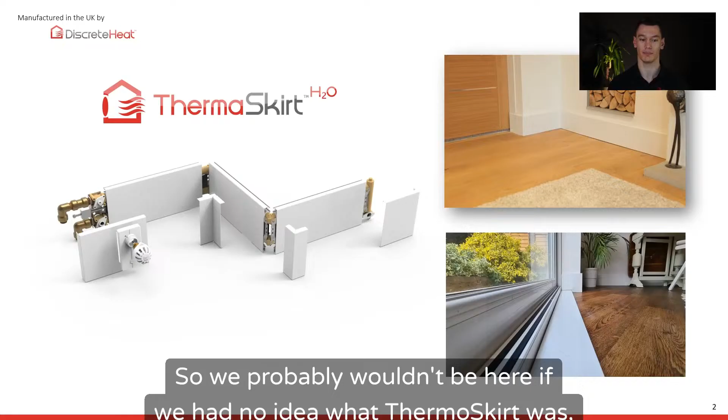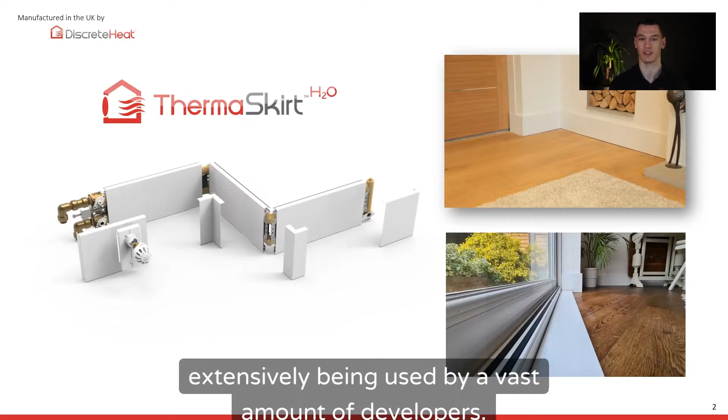So we probably wouldn't be here if we had no idea what ThermaSkirt was, but essentially it's just another heating alternative to underfloor heating and radiators. But it's disguised as a skirting board in an aluminium panel, as you can see from the pictures. It's used in both retrofit and new build programs and is now extensively being used by a vast amount of developers. One of which to name is actually Barratt's, one of the largest UK house builders.

So I'm going to leave you with the technical director of Barratt's and Channel 4's George Clarke with their thoughts on ThermaSkirt before we get into the nitty gritty.

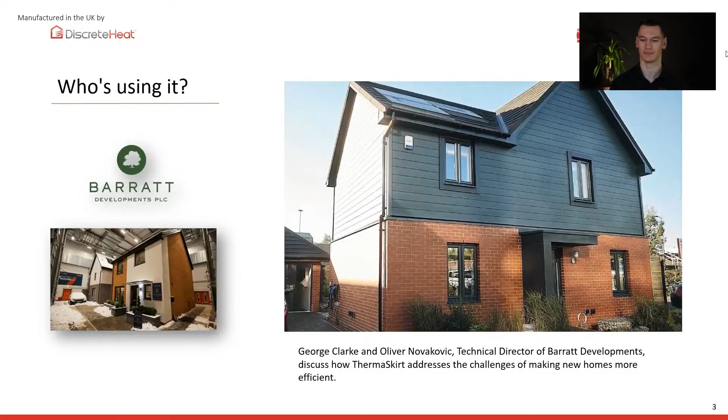There's some great stories around the Zed House. And I mean, obviously we can't physically see it. I wish we were there having a look around it now, but just paint a picture of what it's like in terms of design and innovation. Yeah. I think the most important thing for me was that the Zed House looked normal. So the Zed House is actually called an Alderney. It's one of the houses we build many thousands of. We have 400 sites, so we're selling a lot of these, so we know customers like the house.

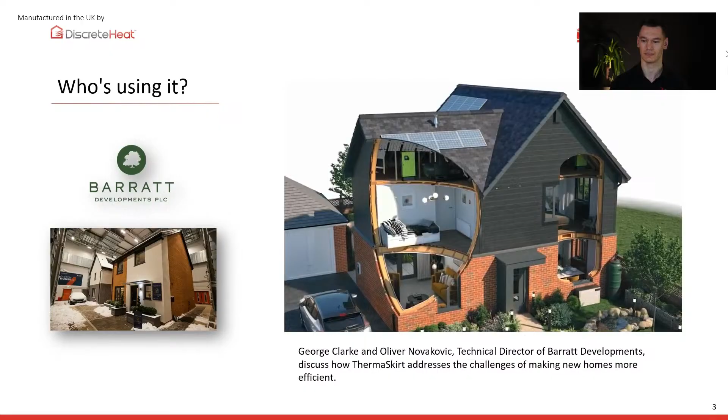The second most important thing was that you could be green in this house without having to try, without a change to your lifestyle. So if you were to walk up to the Zed House, you wouldn't know that it was a zero carbon home. And if you walked around it, except for an air source heat pump on the outside, which wouldn't be normal in today's house, and some of the innovative heating systems like infrared and skirting boards that deliver heating, you wouldn't know. You'd just live a normal life, but actually you'd be saving 70% of the energy that you'd usually use. That's quite a lot, isn't it? So skirting boards deliver heat energy?

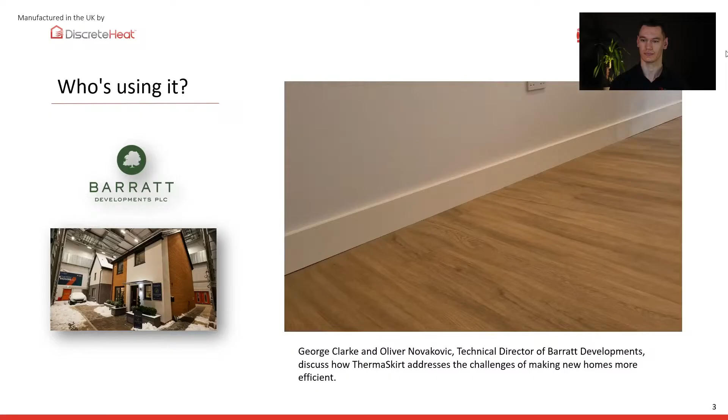Yeah. So you'll know with the air source heat pumps, the temperature of the water reduces down to 40, 45 degrees, so you need a lot more surface area. The problem in the houses is surface area delivered by radiators means they could be quite big, and radiators get in the way of furniture and other things. So Salford University actually introduced us to this innovation where the hot water goes into the skirting board. So all of your skirting boards are the radiator. So you've got no other radiators in the house? So in the Zed House I have, because I'm testing. But actually in some of the other houses we're now trialling, we won't have radiators. We'll either have skirting board heating or underfloor heating.

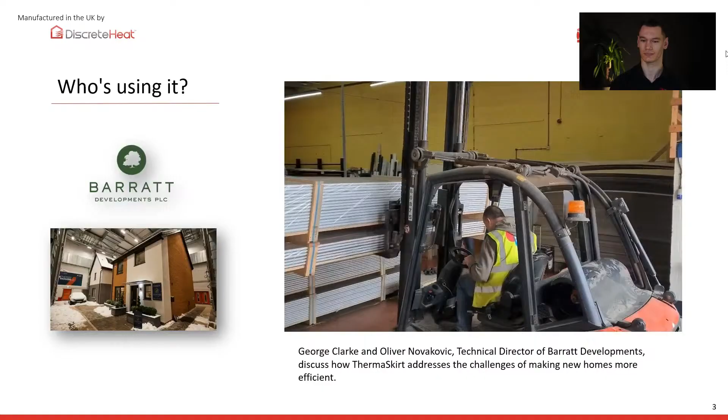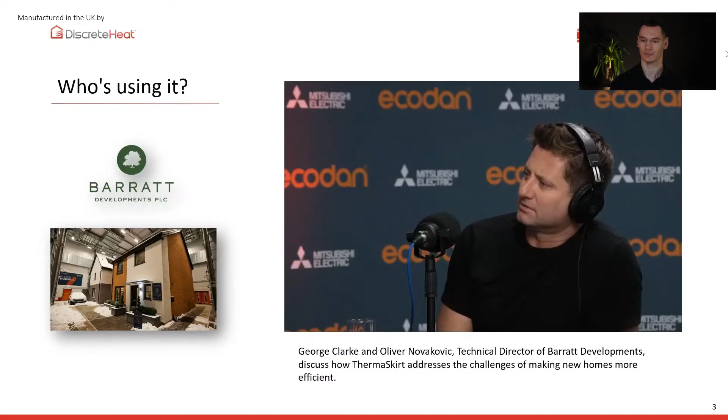So multifunctional skirting board? Yeah. Love that. And what's great about it is that you can also put electric down it. So as you know, as we move further along the zero carbon agenda, we're going to really concentrate on fabric. So the skirting board's a bit like ductwork for running services? Yeah. So as you know, in offices, we've regularly ran electrics, haven't we, down the service. Here, we're running hot water in the skirting board. There's some great...

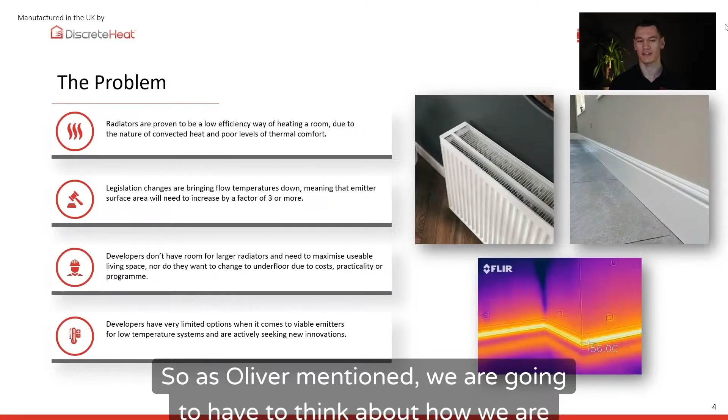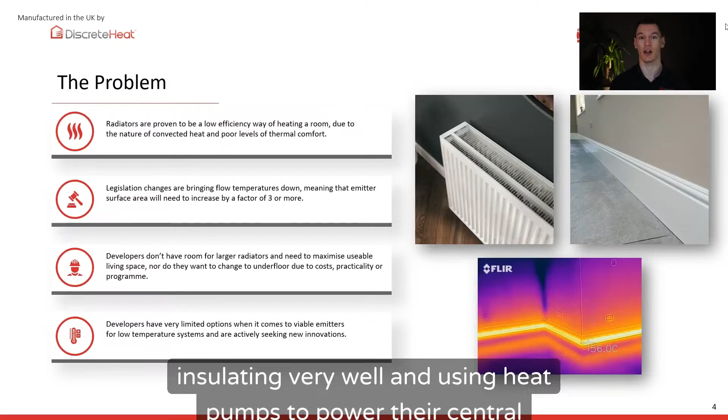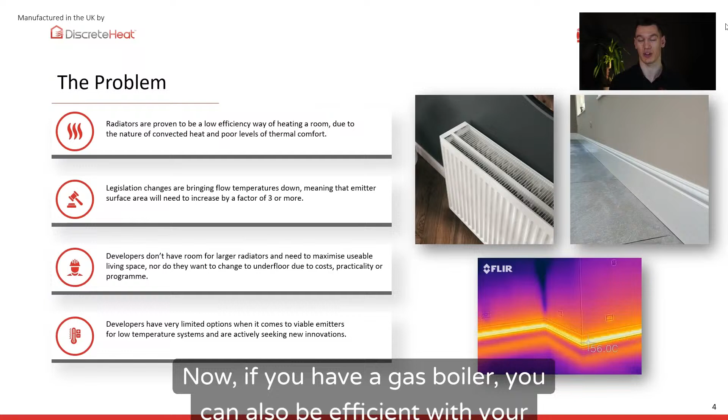So as Oliver mentioned, we are going to have to think about how we are going to be more efficient with our heating systems. And how Barratt's will do this with their new build houses is by insulating very well and using heat pumps to power their central heating, running at really low flow temperatures. Now if you have a gas boiler, you can also be efficient with your heating system too, by reducing the flow temperature to around 55-60 degrees. Obviously you'll increase the efficiency of your boiler.

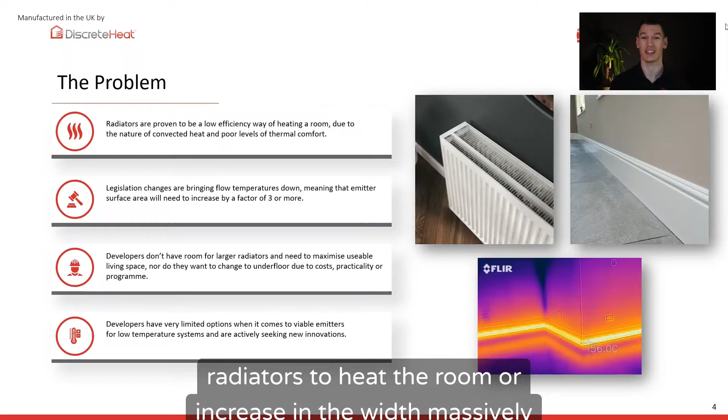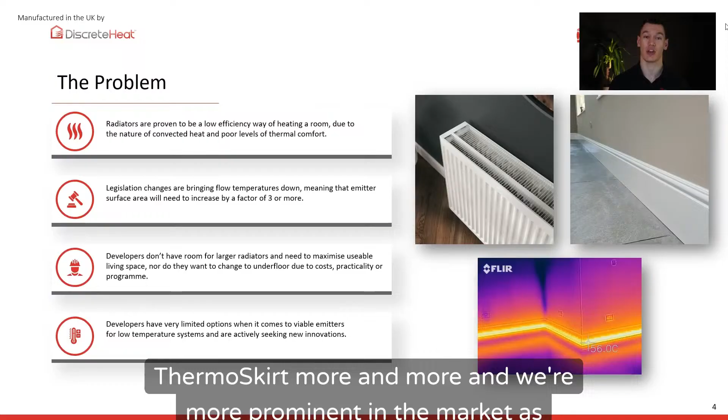However, as developers are experiencing, if you do reduce your flow temperatures, you are going to have to increase the size of your emitters. So with radiators, you'll be looking at either double or triple panel radiators to heat the room, or increasing the width massively along a wall. This isn't particularly aesthetically pleasing for developers or one of our 80,000 customers that we have to date, which is why they're looking to use ThermaSkirt more and more, and we're more prominent in the market, as we fit a nice aesthetic heating solution that's efficient and works really well.

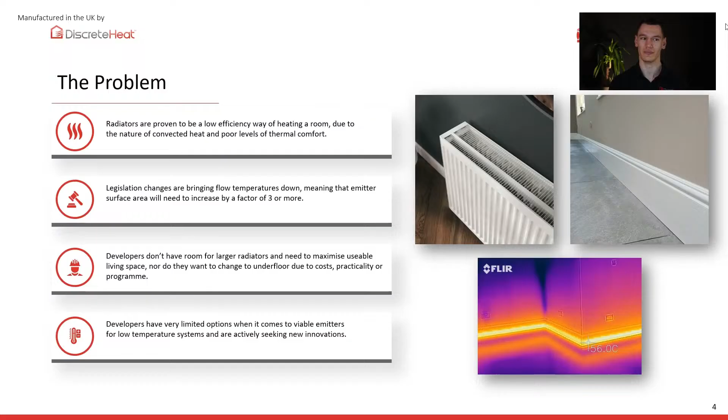Now, to really see the conversion of a radiator to ThermaSkirt, I've got a table here just to show exactly that. So these outputs are at delta T20 or 45 degrees flow.

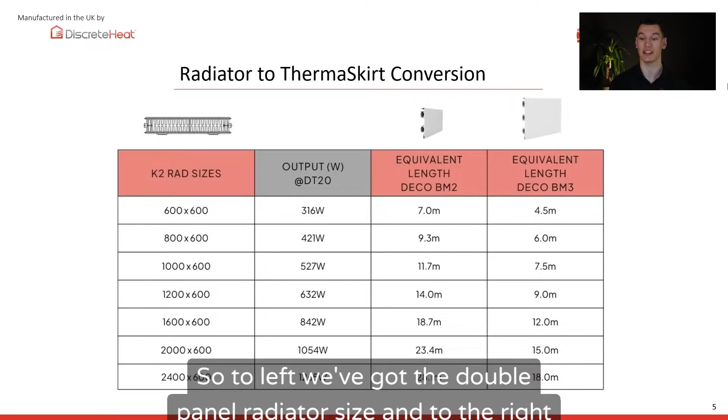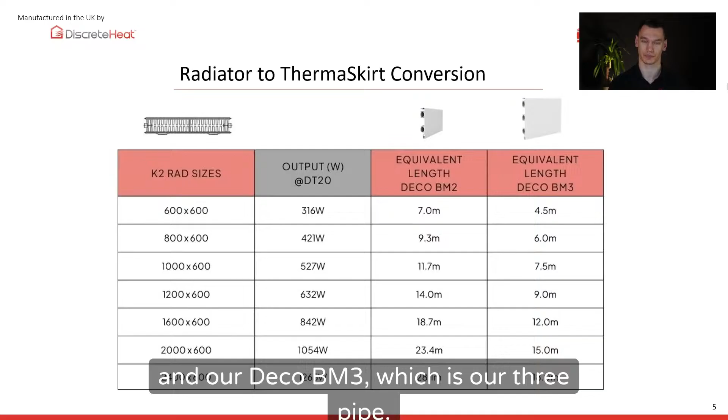So typically what a heat pump is going to be running at. So to the left we've got the double panel radiator size, and to the right we've got the equivalent length of our Deco BM2, our 2-pipe system, and our Deco BM3, which is our 3-pipe. So if you had a room that had a heat loss of around 500 watts, in order to meet that demand, you would need a 1 meter long double panel radiator to meet those heat loads.

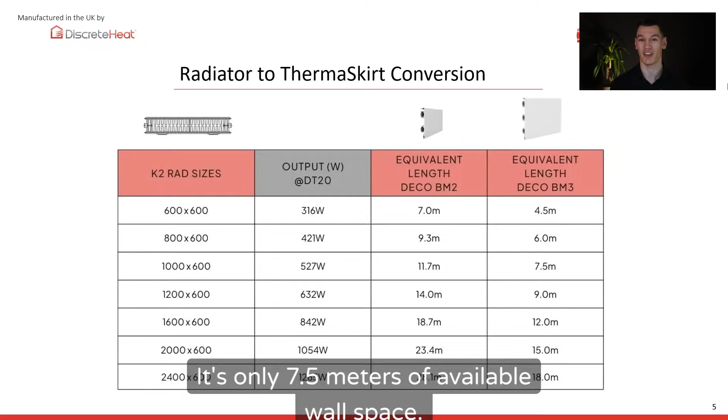Whereas if you were using ThermaSkirt for the 2-pipe system, you'd only need 11.7 meters of available wall space. Whereas with a 3-pipe, obviously it's a little bit bigger, so larger surface area, you need even less. So only 7.5 meters of available wall space. So essentially, ThermaSkirt eliminates the aesthetic and practical compromises involved with radiators with the increase in the size of the emitters.

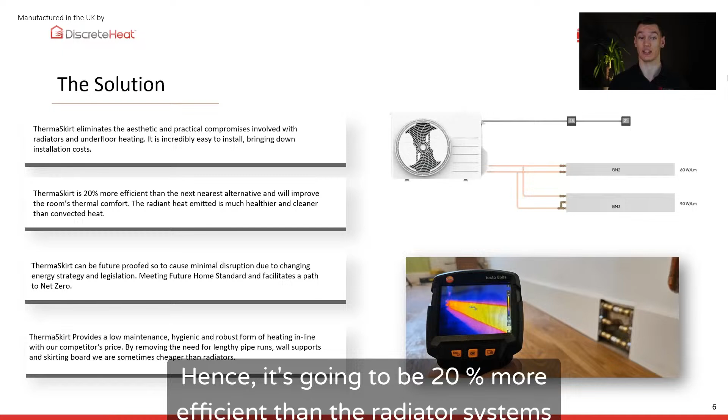Now, with boilers, how they're actually rated and tested, they're run at condensing temperature, which is around 50 to 55 degrees. So what our customers have been doing is designing at these flow temperatures and getting ThermaSkirt in order to meet those heat demands. And we've been seeing them save around 20% on their energy bills. Hence, it's going to be 20% more efficient than the radiator systems that they already have.

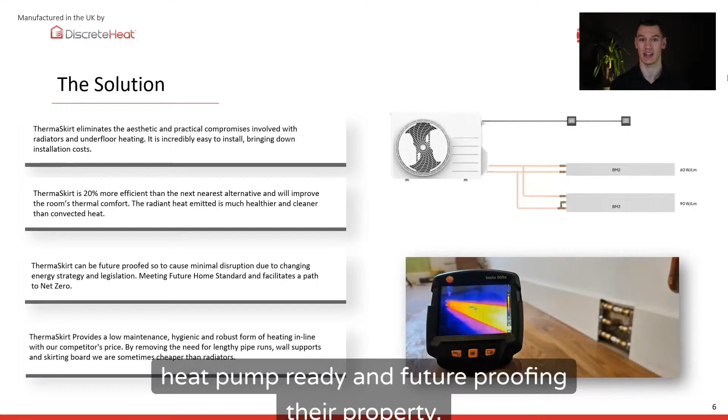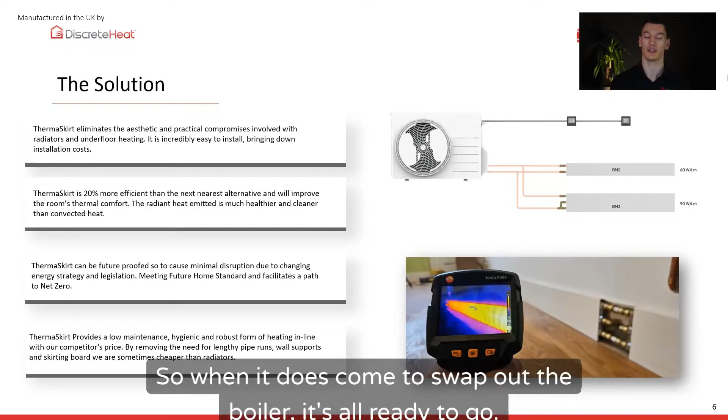So some customers have been taking it one step further and getting heat pump ready and future-proofing their property. They do this by removing the radiators, designing at really low flow temperatures such as 45 degrees. So when it does come to swap out their boiler, it's all ready to go. So they've got their heating emitters, they're ready for the heat pump, get rid of the boiler, put the heat pump in, so it minimises the amount of disruption and makes it more practical for a low flow heating solution.

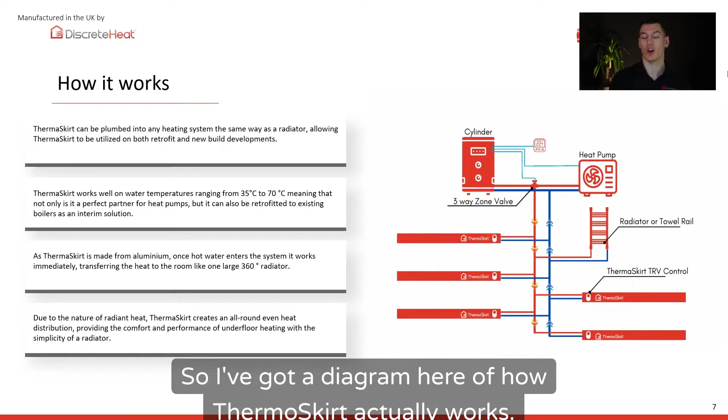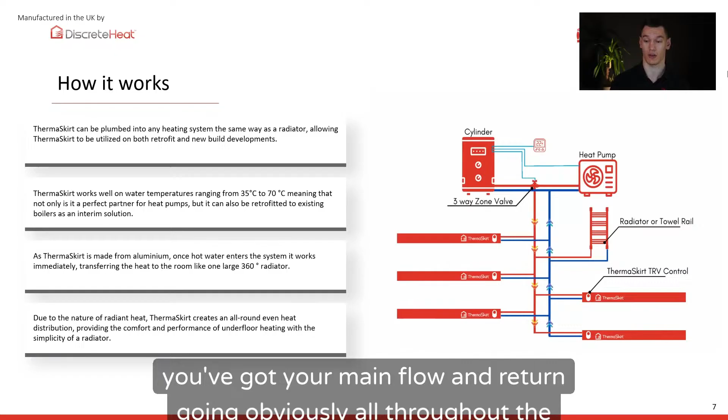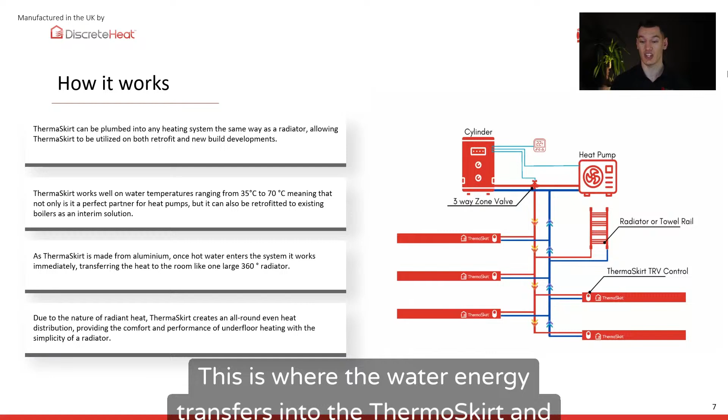So I've got a diagram here of how ThermaSkirt actually works. So we've got a central heating system powered by a heat pump, and you've got your main flow and return going all throughout the house. Then you're teeing off into 15mm copper or plastic going into the ThermaSkirt. This is where the water energy transfers into the ThermaSkirt and that radiates into the room.

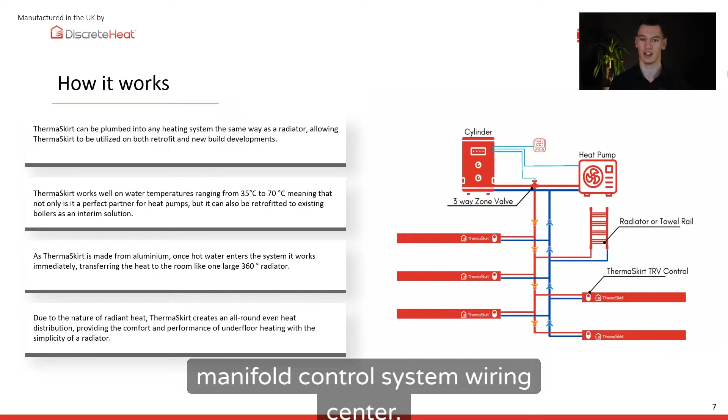The ThermaSkirt is either controlled by a manual TRV, similar to a radiator, but the dial is at skirting level, neater than a radiator TRV. You turn it 1 to 5, very simple. Or you can go more the underfloor heating side with a manifold control system wiring centre. So you've got that flexibility there.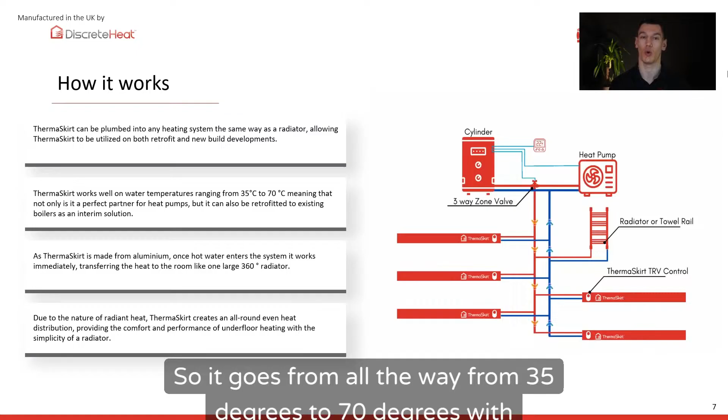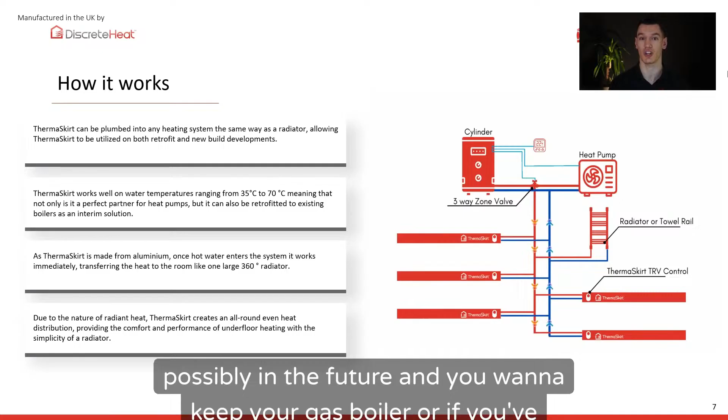So not only have you got flexibility with controls, but you've got flexibility of the flow temperature as well. So it goes all the way from 35 degrees to 70 degrees with ThermaSkirt. So it's the perfect interim solution whether you're getting a heat pump possibly in the future and you want to keep your gas boiler, or if you've got an oil boiler that goes to around 70 or even higher as a flow temperature.

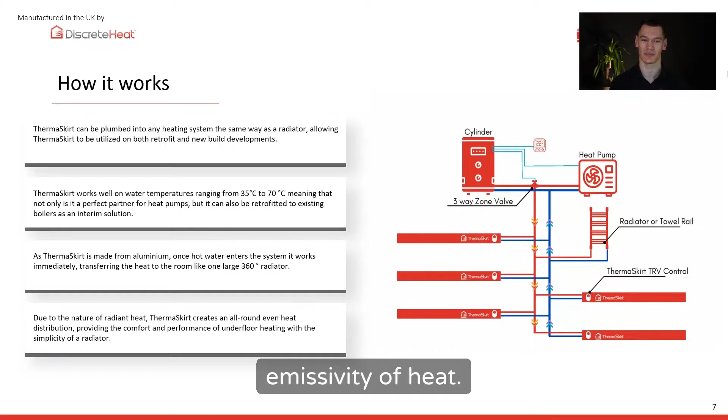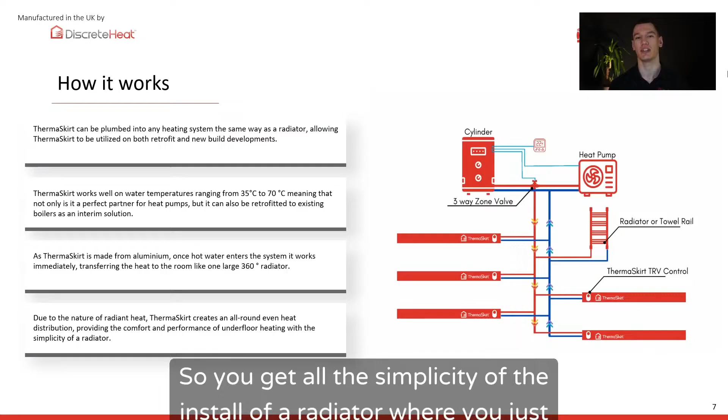So the reason why ThermaSkirt is more efficient is because it's made of aluminium, as aluminium has a very good emissivity of heat, and it's essentially one squashed and stretched radiator that distributes evenly all around the room rather than just a single point. So you get all the simplicity of the install of a radiator where you just use two 15mm pipes, but you get the distribution of heat similar to underfloor heating where it's all around the room.

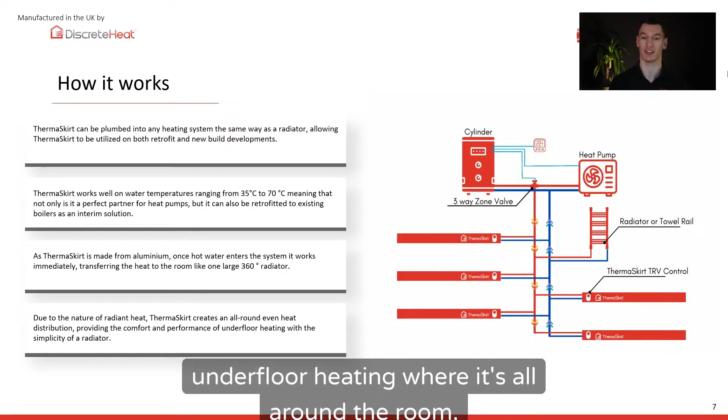So what shows this thermal comfort really well is the test data done by BSRIA. So they tested 2 rooms, 4 by 4 meters, as you can see here. So to the left, you've got 800 watts of convected heat, which was delivered by radiators. And to the right, you've got 800 watts of radiant heat delivered by ThermaSkirt.

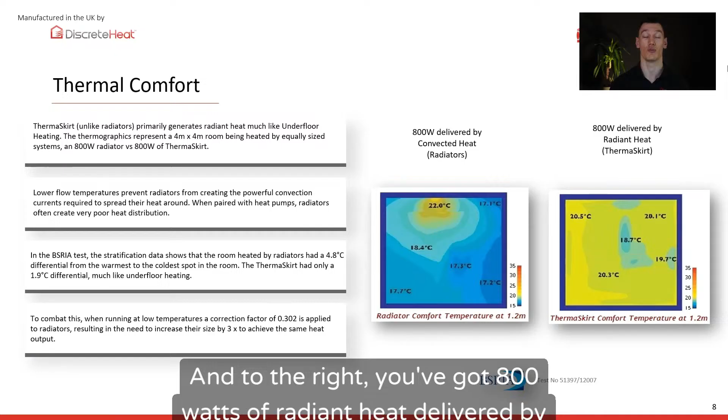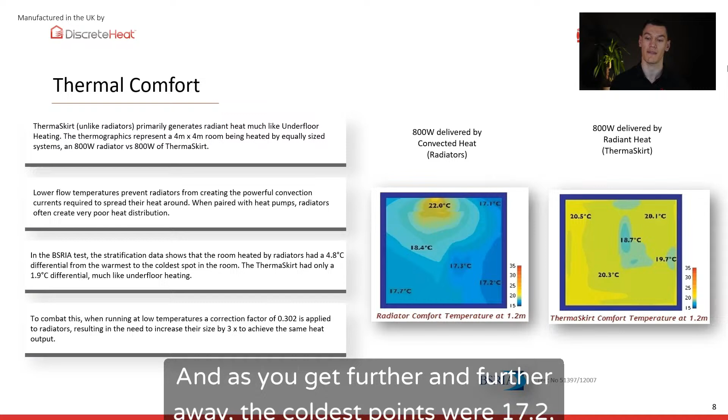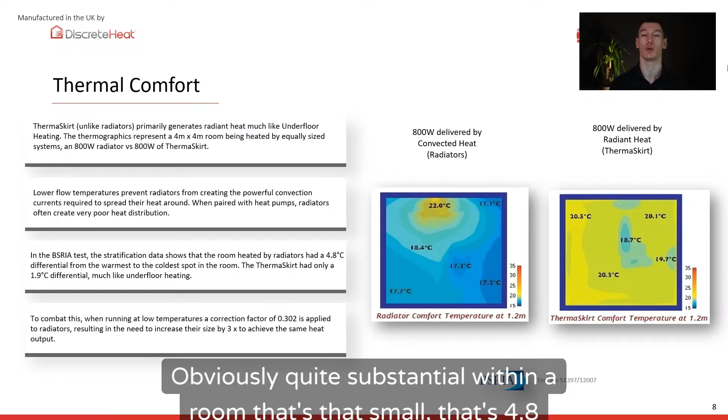So as you can see, the hottest point by the radiator itself is around 22 degrees. And as you get further and further away, the coldest points were 17.2, 17.1 degrees, which is obviously quite substantial within a room that's that small. That's 4.8 degrees from one side to the other. Now if we look at ThermaSkirt, the differential of temperature was significantly better and hence more comfortable, with only a differential of 1.9 degrees. So very similar to underfloor heating.

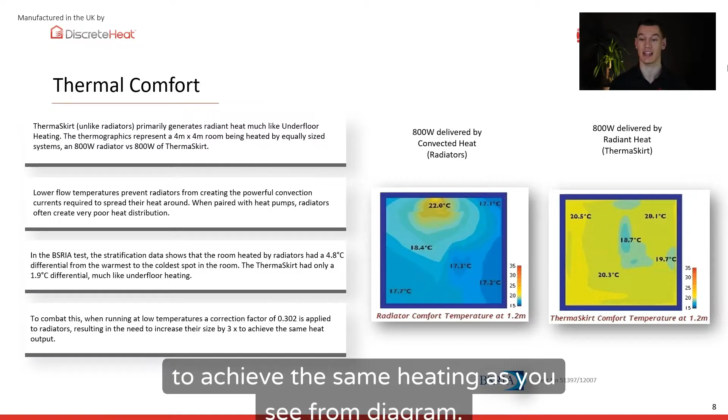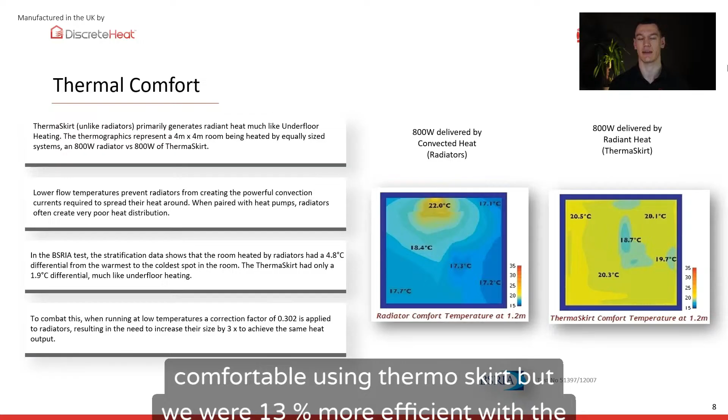So with radiators, in order to adapt for this lower flow temperature, they have to triple in size essentially, so that's a correction factor of 0.3 in order to achieve the same heating as you see from the diagram. So what BSRIA found is obviously it's significantly more comfortable using ThermaSkirt, but we were also 13% more efficient with the heating.

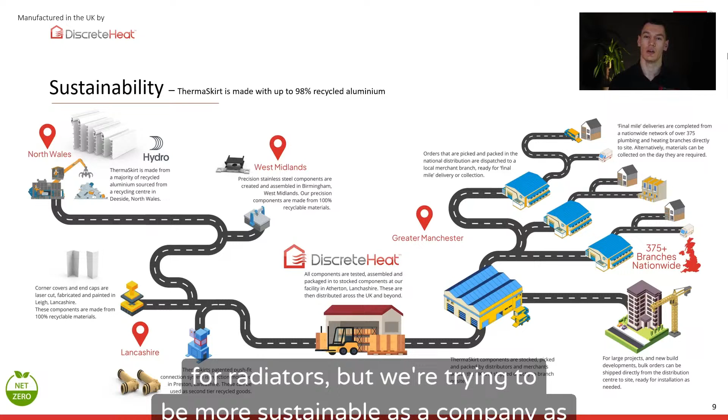So not only that, obviously we're more efficient than radiators, but we're trying to be more sustainable as a company as well. So this is just showing how ThermaSkirt goes from raw aluminium all the way into someone's home as a heating system.

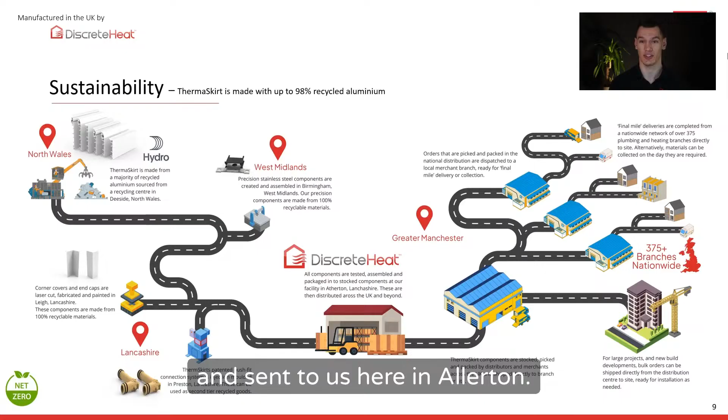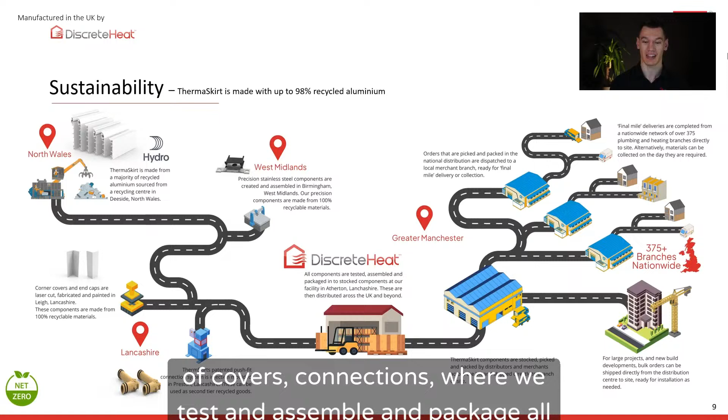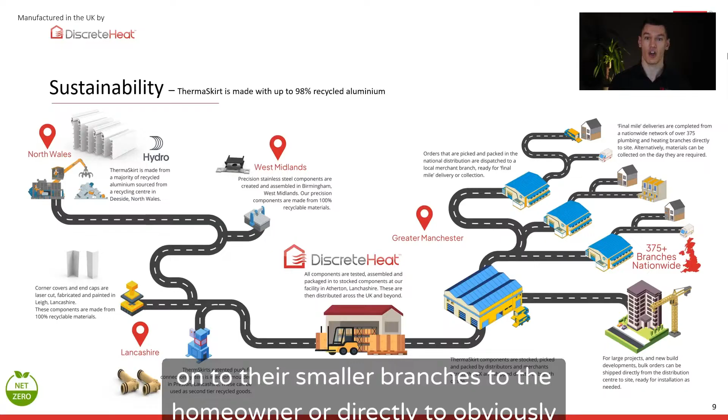So it starts off in a company in North Wales where it gets extruded and sent to us here in Atherton. We get other components from the West Midlands, Lancashire, all sorts of covers, connections, where we test and assemble and package, all ready to send over to distribution, such as City Plumbing, who then send it on to their smaller branches to the homeowner, or directly to larger projects, like a large apartment or new build projects.

So with our sustainability, the recycled aluminium that we use is up to 98%. So obviously it's quite high, trying to reduce our carbon footprint. And all parts that we manufacture are 100% within the UK. So we're really trying to not only reduce everyone's heating bills and be a little bit more green in terms of central heating, but as a company as well, reducing our carbon footprint.

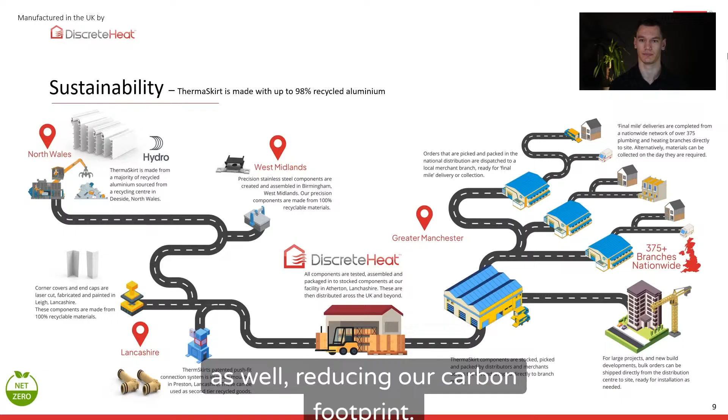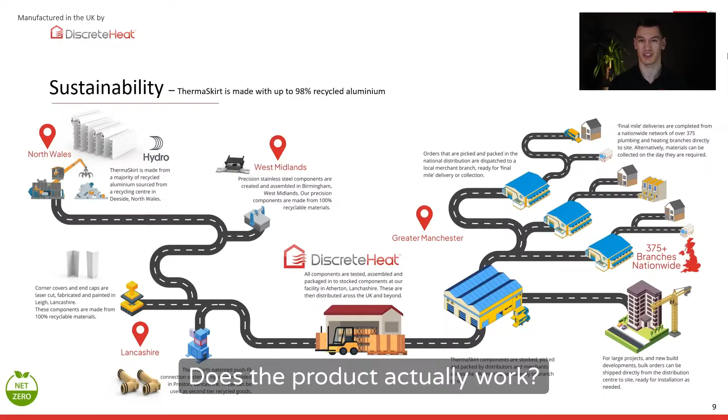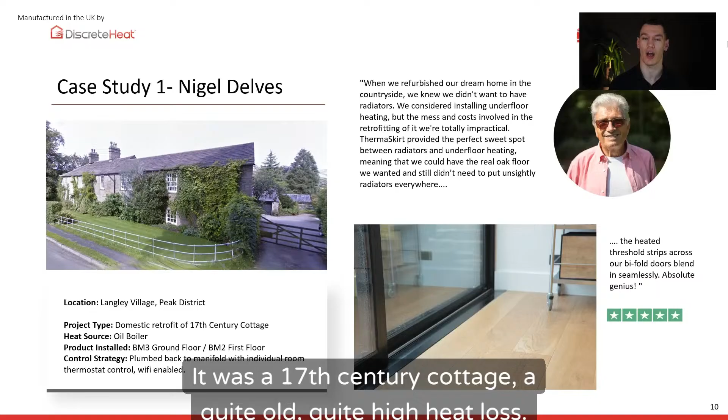So obviously with that test data, it's very clear that ThermaSkirt is very efficient, it's better than a radiator. We're trying to be more efficient as a company. Does the product actually work? So I've got a case study here, a real life one from a gentleman named Nigel Delves. So this is his particular property. It was a 17th century cottage, so quite old, quite high heat loss. So lots of glazed areas.

So essentially, Nigel would have had to have many radiators within a room, really ruining the aesthetics of what he was trying to go for. And retrofitting underfloor heating would have been an absolute nightmare and cost a fortune as well. So he found us, and he was very impressed. Obviously, we were the best of both worlds. You get all the ease of install with the feeling of underfloor.

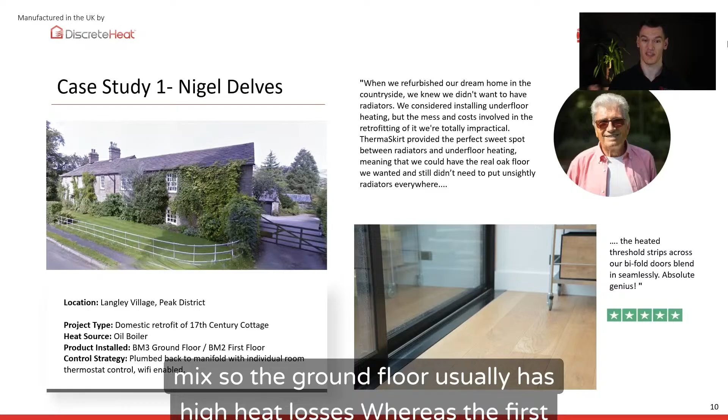So Nigel had the BM3, so the 3-pipe for the ground floor and the 2-pipe for the first floor. And the reason we use the mix is because the ground floor usually has higher heat losses, whereas the first floor has less. So you don't necessarily need to have one or the other throughout the house.

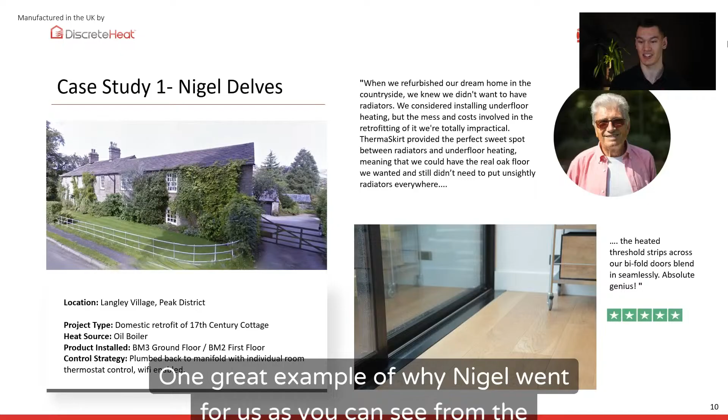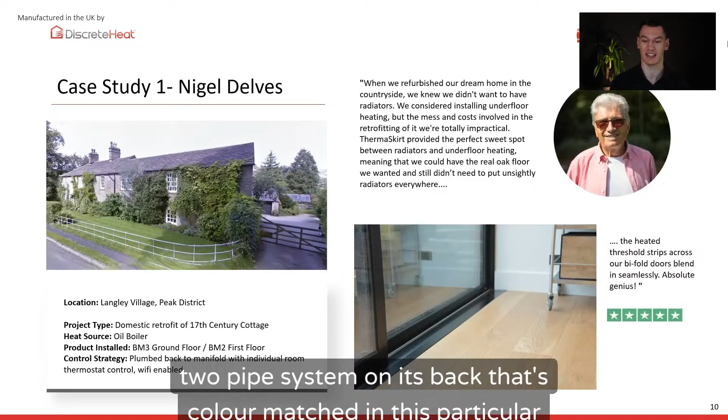One great example of why Nigel went for us, as you can see from the picture, is our heated threshold, which is essentially our 2-pipe system on its back that's colour matched, in this particular instance, to black. So all these zones were plumbed back to a manifold with individual room thermostat control that was Wi-Fi enabled. So he was able to control each room with a thermostat, similar to an underfloor heating system.

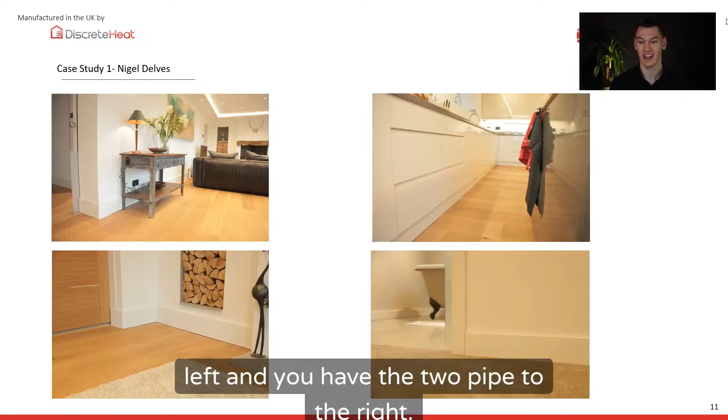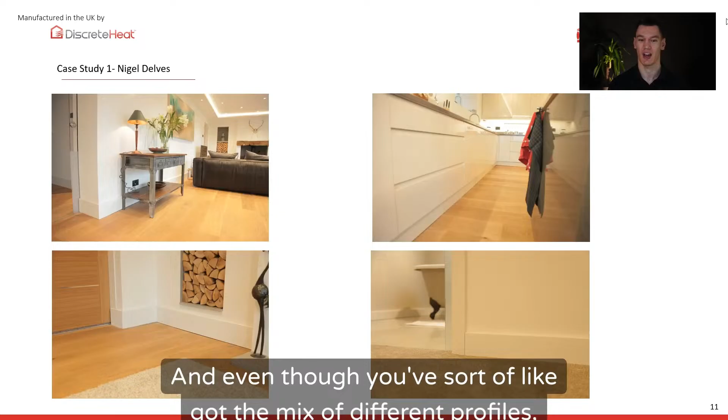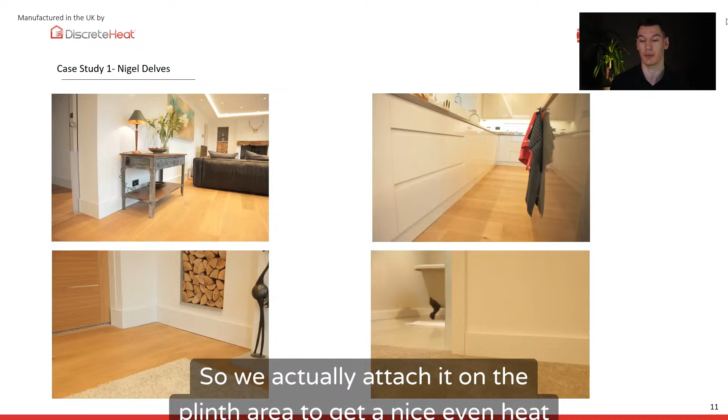And here are some great examples of the 3-pipe on the wall to the left, and you have the 2-pipe to the right. So you've got the bathrooms there in the bottom right, and it really looks very aesthetically pleasing. And even though you've got the mix of different profiles, you can't really tell. Now to the top right is actually our 2-pipe system on kitchen plinths. So we attach it on the plinth area to get a nice even heat distribution all around the room to keep you comfortable throughout.

Now it works great on an old build. This particular one was on a boiler. Now how does it work on new build projects on lower flow temperatures? So this is what we've done with Kingswood. This is our second case study that we're looking at on the webinar.

So Joel Winders is the commercial director of Kingswood Homes. He was having an extension done and found our product and was very interested in using it, got it installed, and was so impressed that he wanted to use ThermaSkirt for his projects within Kingswood, where he proposed it to his colleagues. And they're doing it this year, and it's been very positive. Customers have wanted to use ThermaSkirt as an option, and it's picked up quite significantly.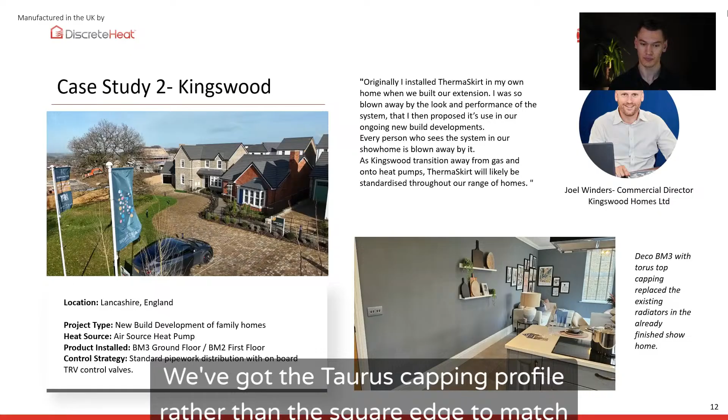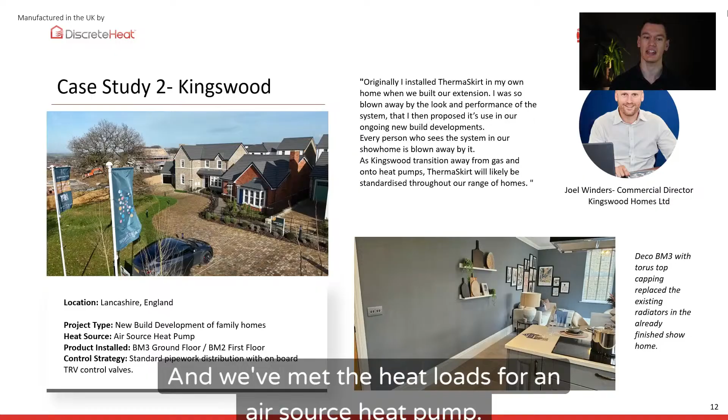So we've designed this to have the 3-pipe on the ground floor, the 2-pipe for the first floor, so similar to Nigel. We've got the torus capping profile rather than the square edge to match their current skirting, so it gives it a more traditional look, or more aesthetically pleasing if you like the style of the capping. And we've met the heat loads for an air source heat pump, so it's actually designed at 45 degrees flow.

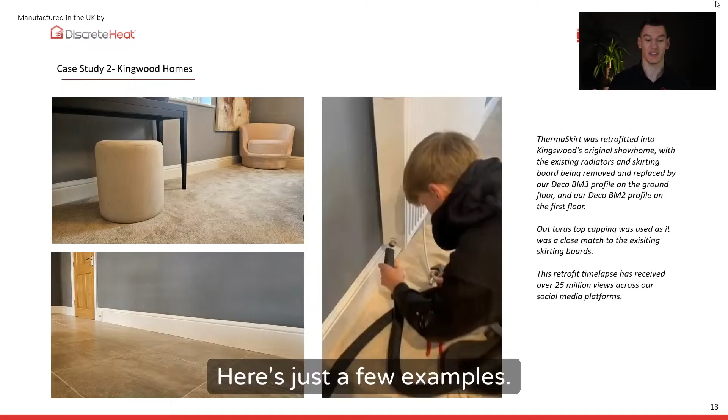And here's just a few examples. So it's powered by the manual TRV, so similar to a radiator. You turn it 1 to 5. And I'm going to leave you with a very popular video, with 25 million views across our social media platforms, of how we actually install ThermaSkirt by removing one of their radiators.

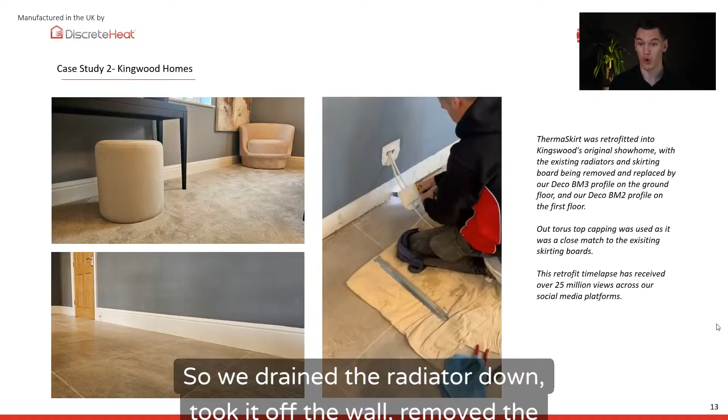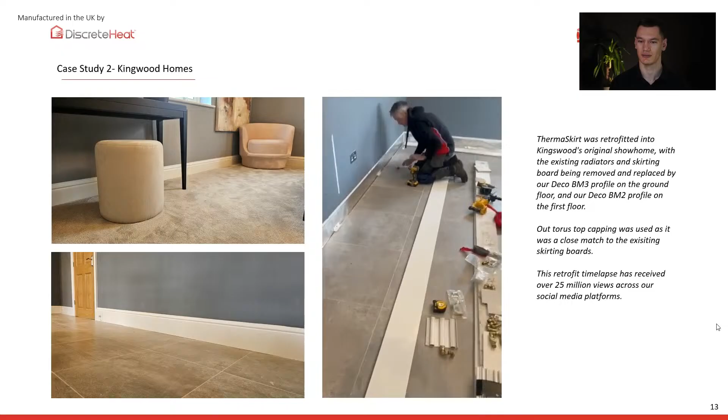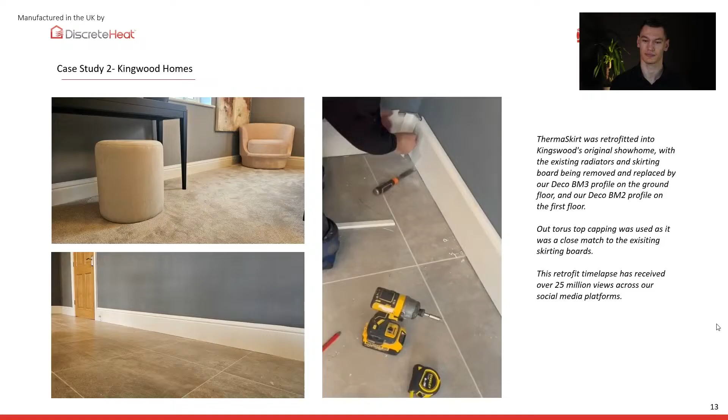So this really goes to show how simple ThermaSkirt actually is to install. So we drained the radiator down, took it off the wall, removed the skirting boards, and now we're preparing the pipework for ThermaSkirt. So we've cut it all, prepared it, put the brackets on. The pipework just plugs in, simple as that. Covers just click into place.

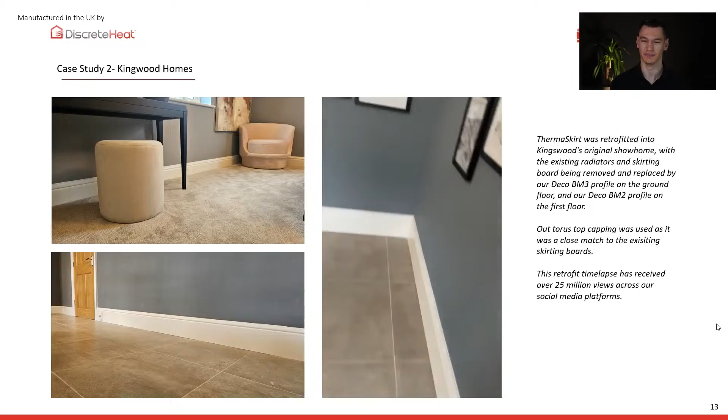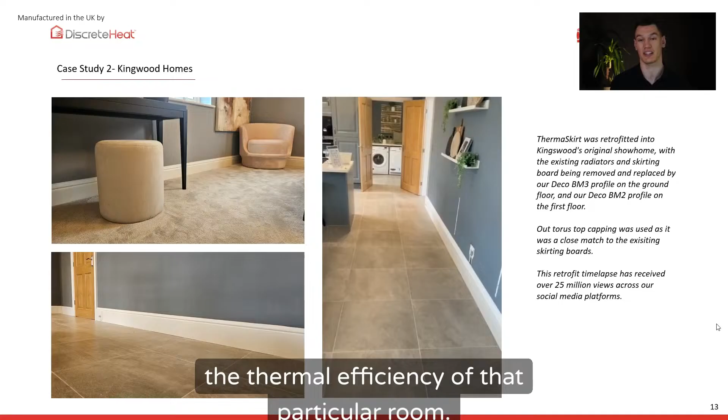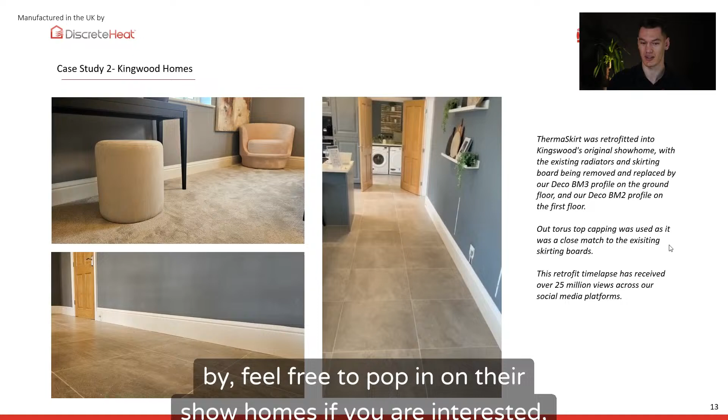And that's it. So dead simple, we've saved a lot of space there and obviously improved the thermal efficiency of that particular room. So a great example. Kingswood, if you do know them and you want to pop by, feel free to pop in on their show homes if you are interested. But yeah, great video that shows how easy ThermaSkirt is to install.

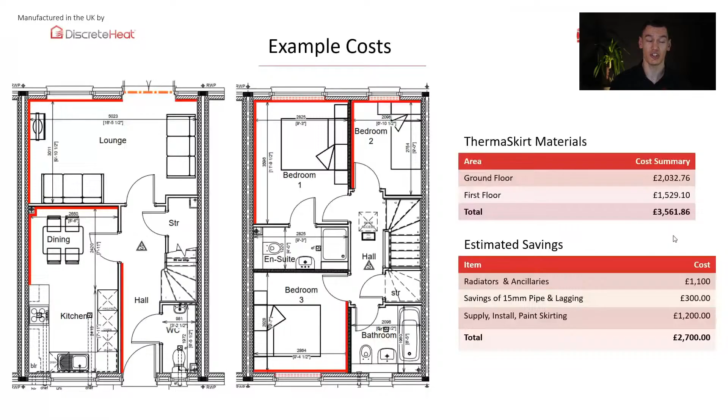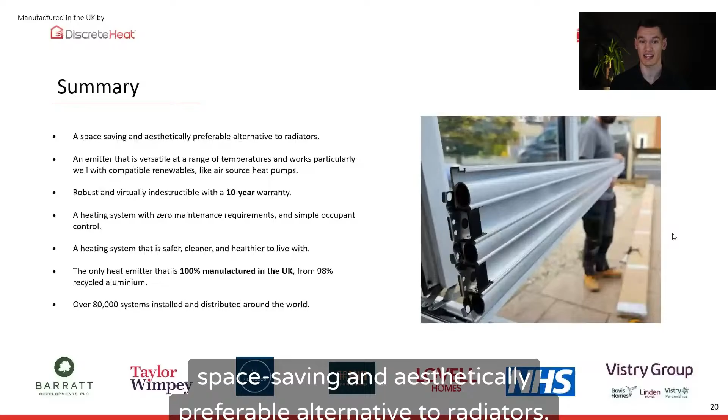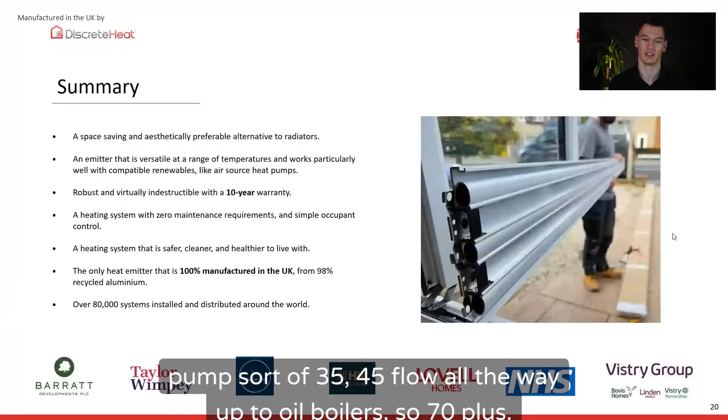So just to summarise everything we've looked at today, I'm sure we can all agree ThermaSkirt is a space-saving and aesthetically preferable alternative to radiators. It works with a wide variety of temperatures, all the way from heat pumps, 35 to 45 flow, up to oil boilers, so 70 plus. It comes with a 10-year warranty and it's very robust. It's been tested with the NHS with a robust product test, so have a look online, there's a video of that.

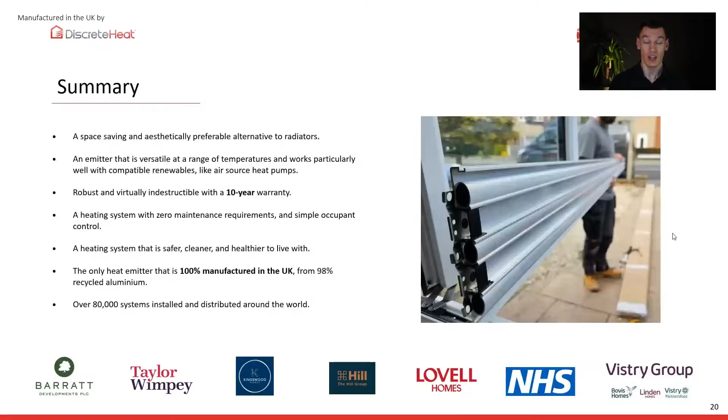There are no maintenance requirements for ThermaSkirt as there are with radiators, so there's no air that builds up after commissioning, and there's no sludge as it's made of aluminium. Hence it's safer and cleaner to live with, and it's not this big metal box on your wall that you can trip on. The heated skirting is 100% manufactured within the UK, and it's made of 98% recycled aluminium. We've done over 80,000 systems to date and have over 15 years of experience, we've seen it all over the years.